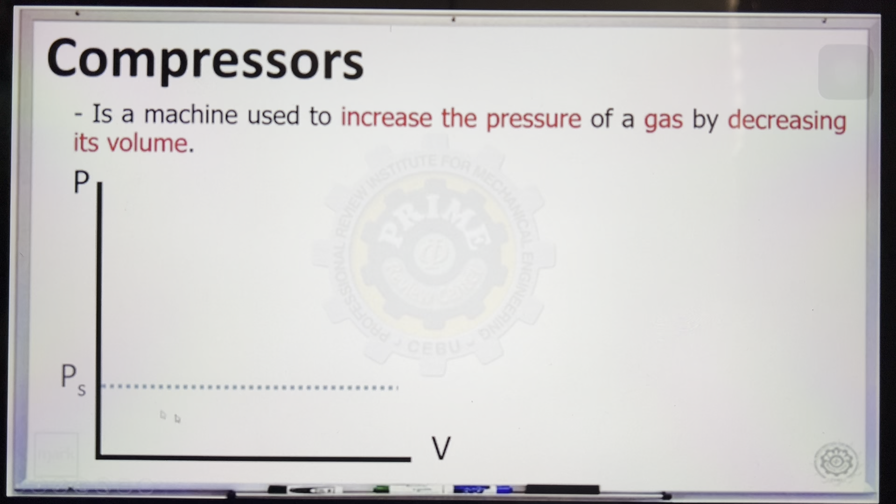Now in compressing the gas, we can compress it in 3 different ways. Let's plot the compression on a PV diagram. We have the pressure of suction, and the pressure of discharge. This is our input, and here is our output.

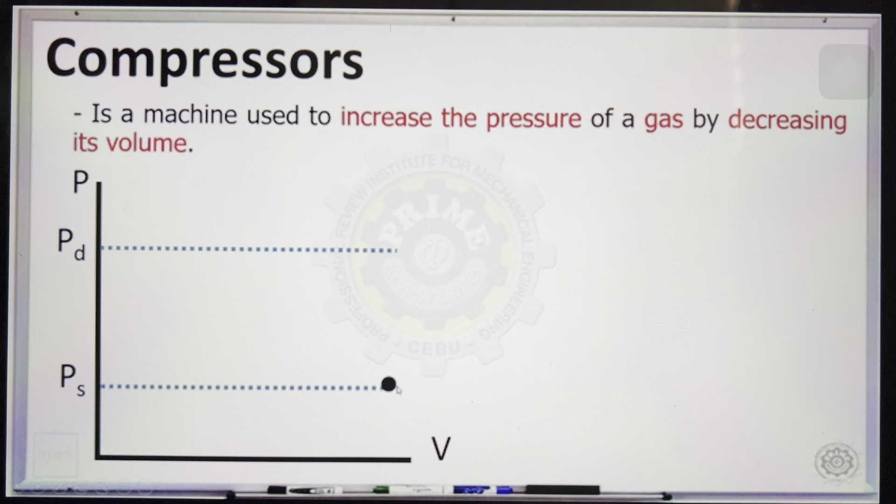We can compress isentropically, that is PV raised to K equals constant. We can compress polytropically, that is PV raised to N equals constant, which is steeper. And lastly, we can have isothermal compression, where PV equals constant. So these are the 3 different ways we can compress the gas.

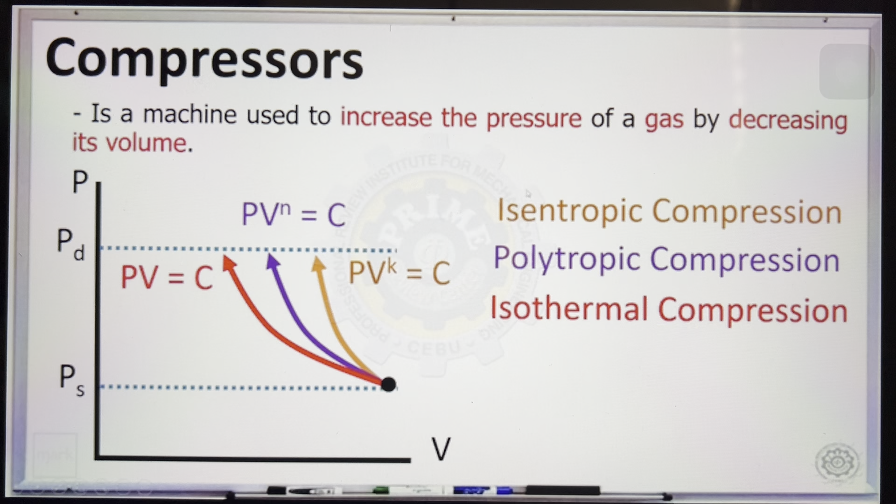Now let's elaborate further. Our discussion will start with the single stage compressor. Once we understand the single stage compressor, the adjustment for multi-stage—2-stage, 3-stage, and so on—becomes easy. So let's focus first on single stage.

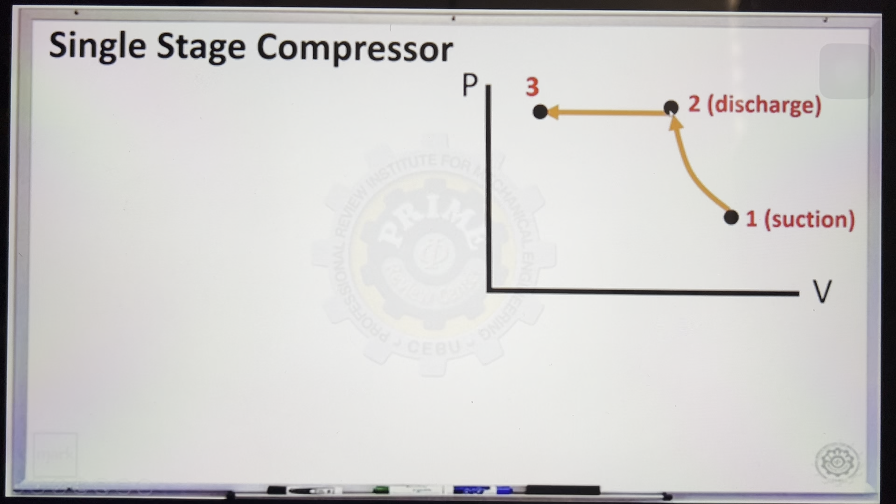In single stage compression, let's make a cycle. Point 1 should be our suction or initial point. We compress it going to pressure 2, that should be our discharge. Then from 2 to 3 is isobaric, and then 3 to 4, and then back to 1. So then we have a cycle.

Let's look at the parts of our single stage compressor. This is our maximum volume V1, and minimum volume V3. Let's call that the volume displaced by the piston. And this part, the clearance, let's call it VC. The difference between V1 and V4 is called the suction volume.

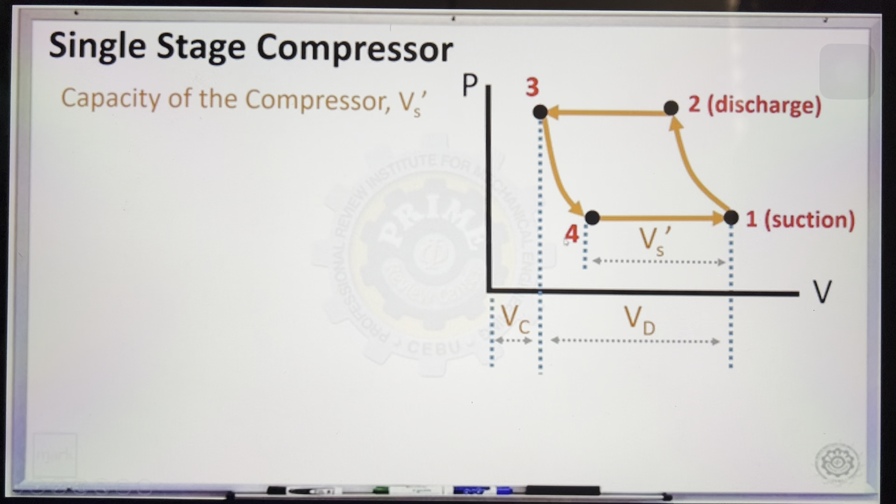Vs prime. So if we're asked for Vs prime, or the capacity of the compressor, the solution is simply PV equals mRT. Most likely the properties given will be at point 1: pressure at suction times Vs prime, the capacity of the compressor, equals mass times R times temperature at suction.

If we're asked for the clearance volume, the formula is C times VD. That should give us CVD—percent clearance multiplied by the volume displaced. Or by inspection, VC is equivalent to V3, where C is the percent clearance.

Next, the displaced volume. By definition, that is simply the maximum volume minus the minimum volume. In our illustration, the maximum volume is V1, and the minimum volume is V3.

Next, another formula for Vs prime: if PV equals mRT isn't given, we can get the capacity of the compressor by subtraction, the difference of V1 minus V4.

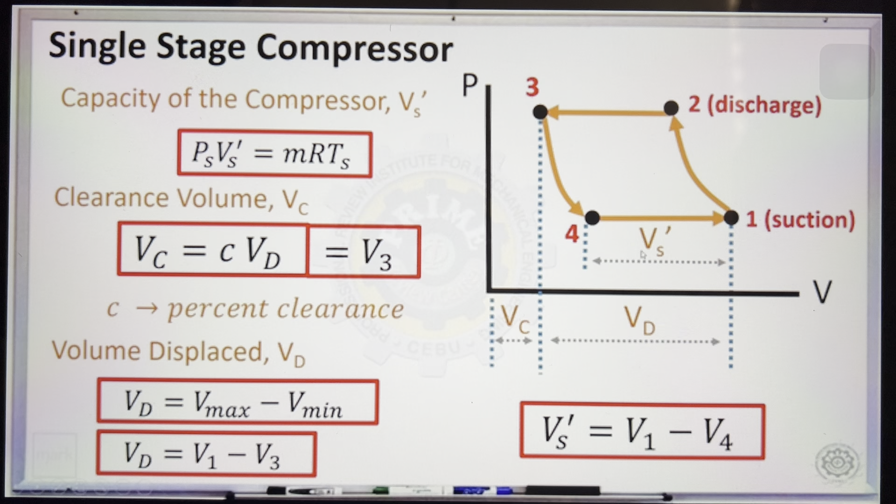So there are many formulas we need to remember, but if we can draw the PV diagram correctly, it becomes easy to recall the other formulas. Again, I'm suggesting we focus on the PV diagram, and if you draw this correctly, it's easier to recall the other formulas.

Another formula for VD: if V1 and V3, the maximum and minimum, aren't given, we may instead be given the description or dimensions of the piston cylinder. We know we have the length, the stroke, and the diameter of the bore will also be given. Once both of those are given, we can calculate the volume displaced.

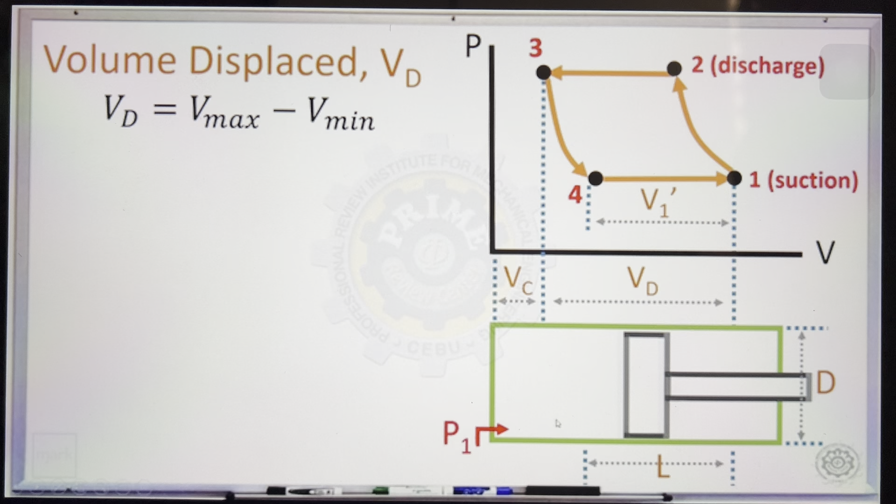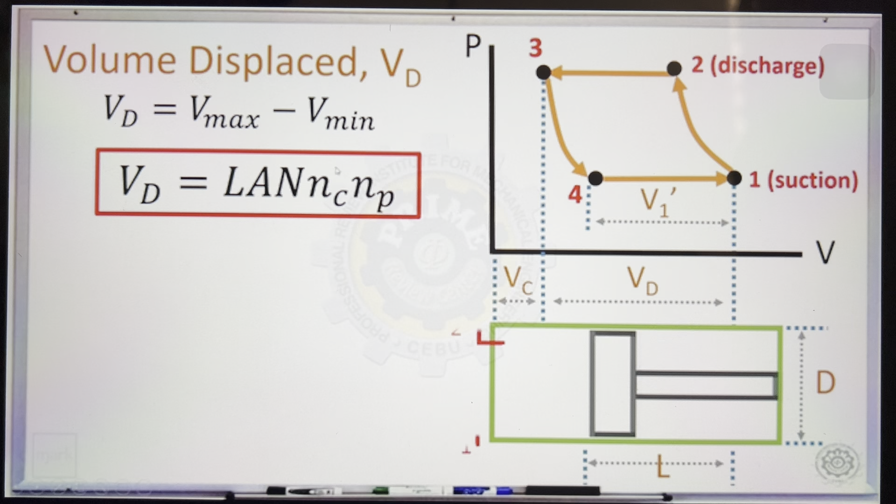So we have suction here, and discharge here. To get the volume displaced, if V1 and V3 aren't given, you can use this: the formula is simply LAN—L is the length, A is the area, and capital N is the engine speed in revolutions per second.

nc is the number of cylinders, number of piston actions. If nothing is mentioned, the assumption is 1 for number of cylinders and 1 for number of piston action. But if something is mentioned, include that in the solution for volume displaced.

For example, if it's mentioned as double acting, you put 2 for the number of piston action. So there are two formulas for VD: maximum volume minus minimum volume, or LAN—length, area, speed, number of cylinder, number of piston action.

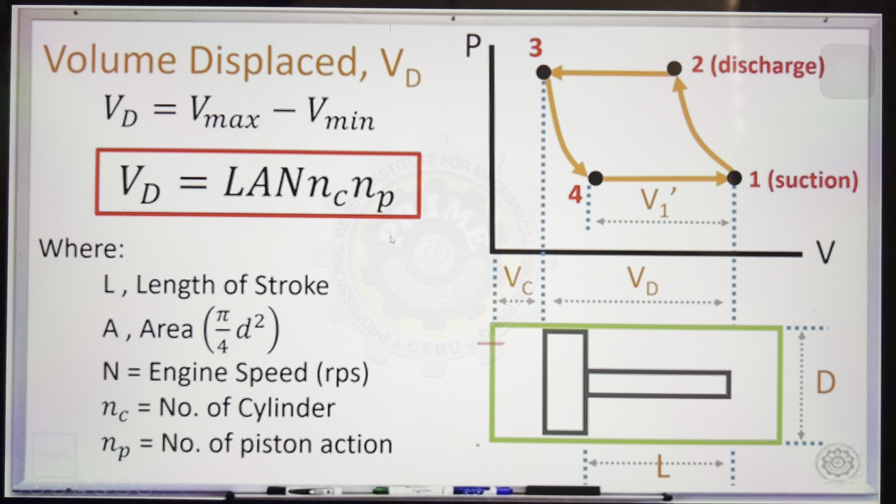Next, how about the pressure, volume, and temperature relations? This was already taught in thermodynamics, so we're simply recalling it. For isothermal, our formula is simply PV is constant.

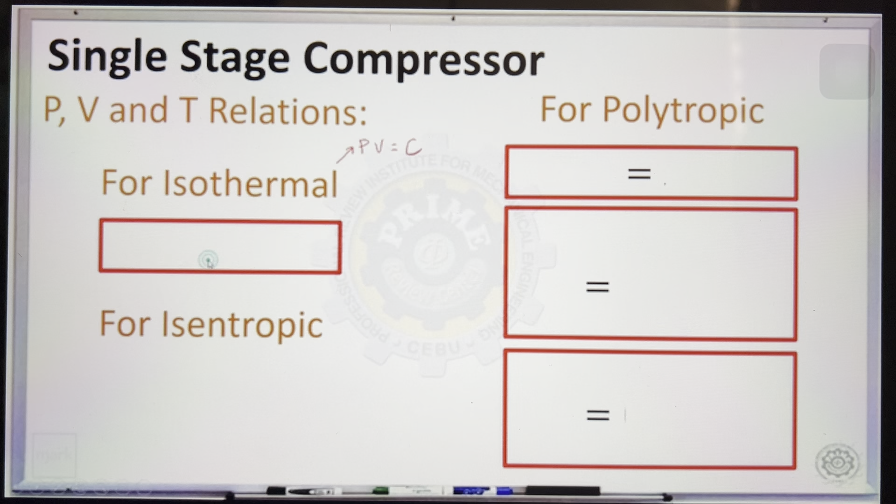So PV is constant, meaning pressure at suction times volume at suction equals pressure at discharge times volume at discharge—that's isothermal. For the polytropic process, there's an exponent N.

This is PV raised to N equals constant. So pressure at suction times volume at suction raised to N equals pressure at discharge times volume at discharge raised to N.

Another formula for the polytropic process, when temperature and pressure are given, is T-P-n. That's how I memorize it: T, P, n. So it's up to you regarding the subscripts—it can be suction to discharge or vice versa. So that's T, P raised to n: the ratio of temperature equals the ratio of pressure raised to n.

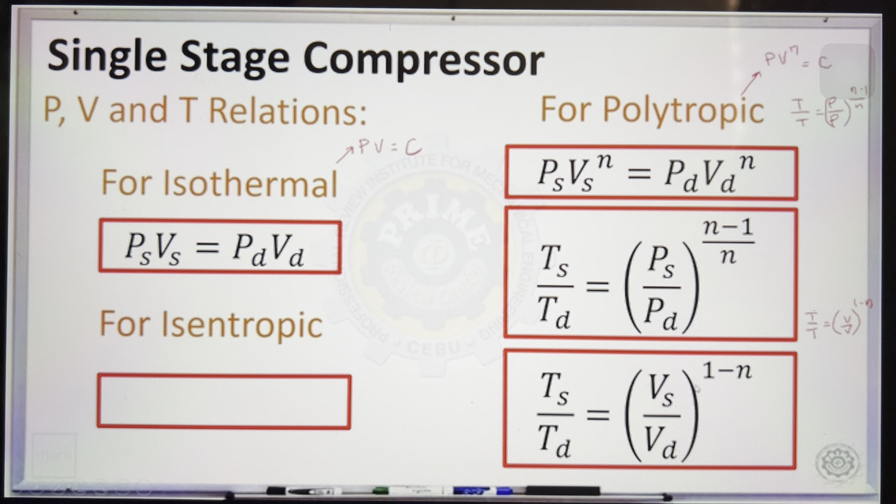For isentropic, just replace N with K, equivalent to 1.4. So the formula is the same for isentropic and polytropic—only the value of the exponent differs. For isentropic, K equals 1.4. So these are simply recalling what was already taught in thermodynamics.

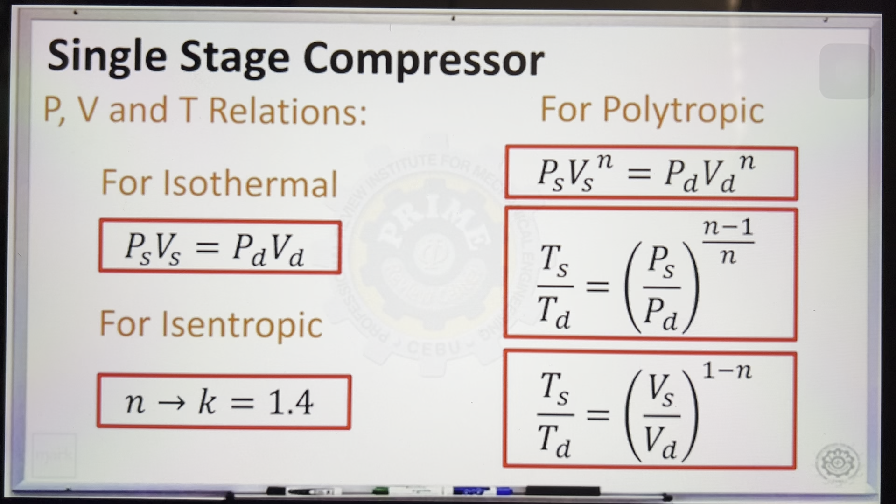Okay, i-derive natin yung formula. Kung makakalimutan yung formula, pwede siyang ma-derive using formula ng work steady flow. Pero still, I'm recommending kabisaduhin na lang. Okay, so pakita ko lang yung derivation.

Ang work ng compressor is equivalent sa work steady flow, na ang formula is n work non-flow. Ang formula ng work non-flow para sa polytropic process is PV: P2V2 minus P1V1 all over 1 minus n. Sa kaso na to, naging discharge minus suction na lang.

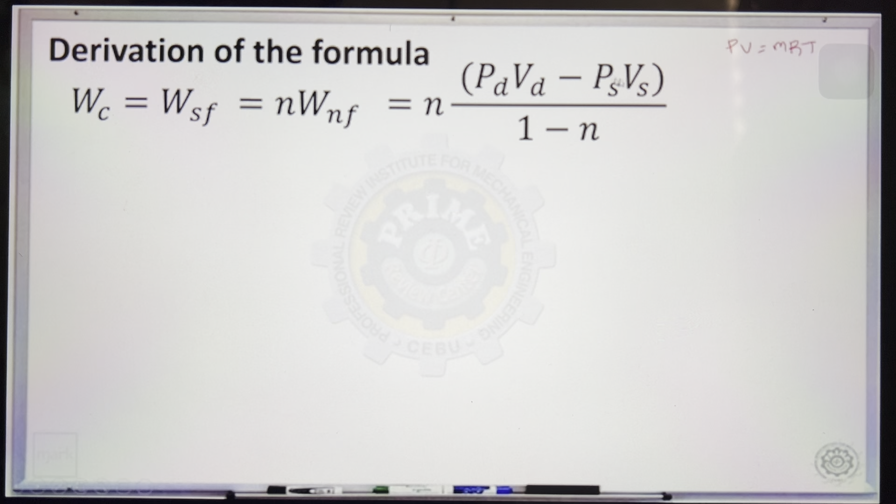Alam natin na PV equivalent sa MRT, so pwedeng palitan yung PV na to ng MRT. Yung PV dito, pwedeng palitan ng MRT din. So you can factor out yung MR. Ang matitira na lang is temperature ng discharge minus temperature ng suction. Pinalitan lang natin at in-adjust.

Next is simplification. Pwede tayong mag-multiply ng 1. TS over TS is 1, so walang nagbabago doon. Ang gagawin mo lang dyan is distribution. Yung numerator na TS, transfer mo dito. Yung denominator na TS, i-divide mo sa dalawa na to.

So ang mangyayari dyan, MRTS, eto is TD over TS. Dito naman, TS over TS, at ang TS over TS is 1. So eto yung naging formula natin.

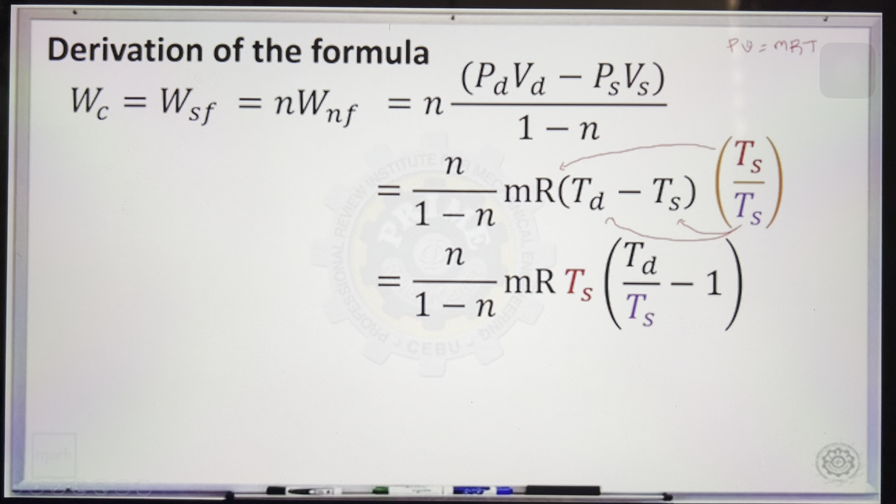Now, we all know na ang MRT, this is MRT, equivalent lang yan sa PV. So yung MRT na to, pwede palitan ng PV. Yung ratio ng temperature, pwede palitan ng ratio ng pressure. If you remember yung T, T, to the n: yung ratio ng temperature, equivalent sa ratio ng pressure raised to n.

So palitan yung MRTS ng PS VS prime. Palitan yung TD over TS ng PD over PS raised to n. So finally, we already derived the formula.

So medyo matagal yung derivation. I'm recommending kabisaduhin na lang to. Pero kung sakaling makalimutan yung formula, tandaan, work steady flow.

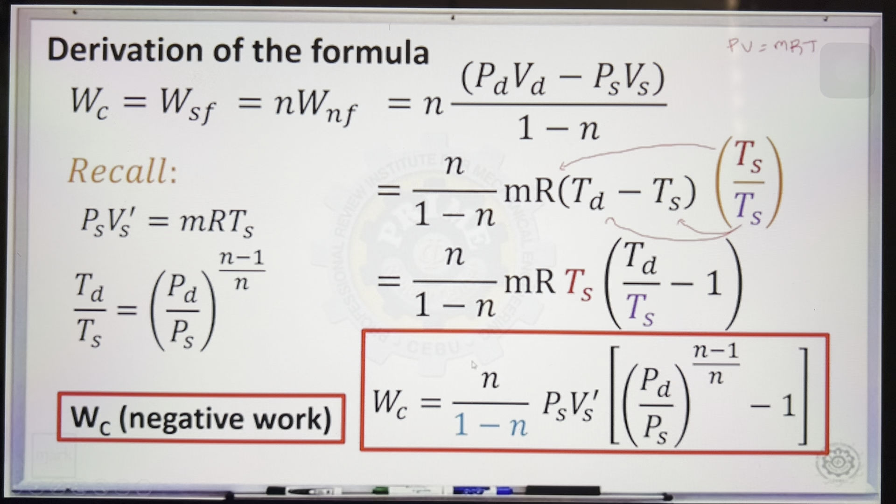Now, every time we solve work ng compressor, ang essence niyan or sign, it should be negative, kasi this is an input work. So isosolve mo siya correctly, you're anticipating a negative work. Kaya lang, in the choices, ang makikita niyong sagot, lahat sa choices, most of the time, positive.

So ang ginawa ng libro, kung pinapansin mo yung equation sa libro, pinagbaliktad niya lang yung 1 tsaka n, para yung magnitude ma-retain, pero yung sagot maging positive lang. Ang tamang sagot should be negative, pero since walang negative sa choices most of the time, pagbaliktarin nyo lang yung dalawa na to para ang sagot maging positive. Bottom line, they have the same magnitude. Pinagbaliktad lang yung 1 tsaka n para lang mag-positive yung sagot.

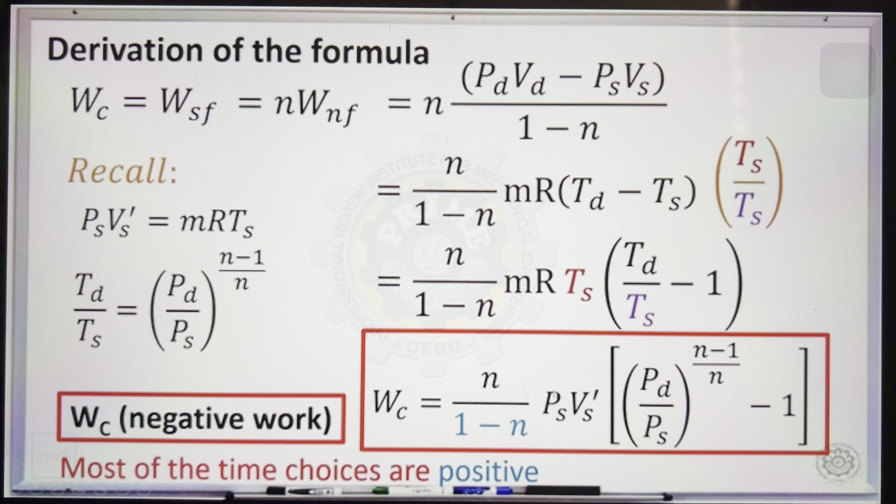Okay, summarize ko na yung formula. Pinakita kayo ng derivation, pero tandaan yung final formula. Ito yun, pagbabaliktarin ko lang to para positive. So this is our general formula: ang work ng compressor is n all over n minus 1, PS VS prime.

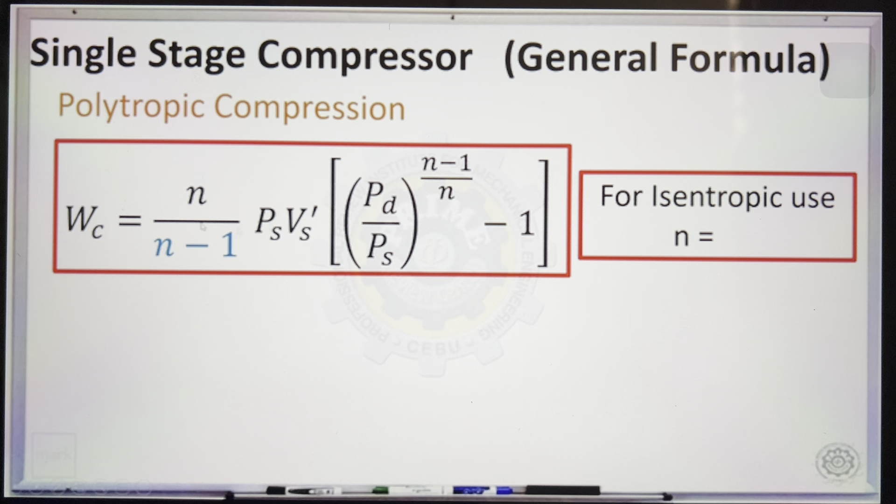So this is the capacity, multiply sa ratio ng pressure raised to n minus 1. For isentropic, palitan lang yung n, gawin lang 1.4. For isothermal naman, ang formula is simply yung formula natin sa work non-flow ng isothermal.

Ang work non-flow tsaka work steady flow sa isothermal ay parehas lang. That is P1 V1 ln lang, that is P1 over P2.

Kaya lang, pag ginamit mo yung tamang formula, negative pa rin yun. So ang ginawa lang sa libro, binaliktad lang itong dalawa: instead na P1 over P2, ang ginawa is P2 over P1. Instead na 1, 2, ang ginawang subscript is discharge saka suction, okay, para lang mag-positive. So these are the general formula.

Okay, isulat yan, transfer sa index card, kabisaduhin. Once makabisado natin, easy to use naman yan, for us lang kompleto yung given. Next.

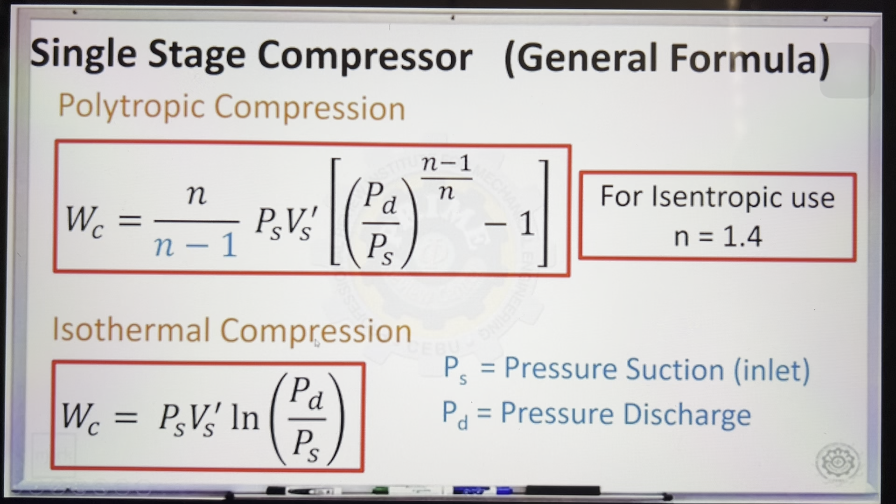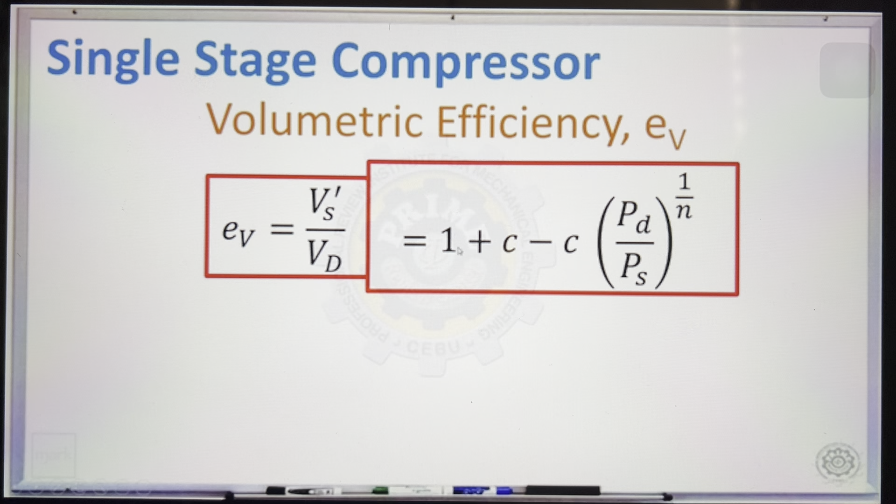Okay, for volumetric efficiency, ang formula naman dyan is ratio ng dalawang volume: maliit over malaki, so that should be suction, or the capacity of the compressor over the volume displaced. Another formula ng EV, kung sakaling hindi given yung dalawang volume, pwede siyang makuha using 1 plus C minus C, ratio ng pressure, discharge over suction, raised to 1 over n.

Okay, another formula is the piston speed. Pag tinanong ka ng piston speed, that is simply 2LN. Next.

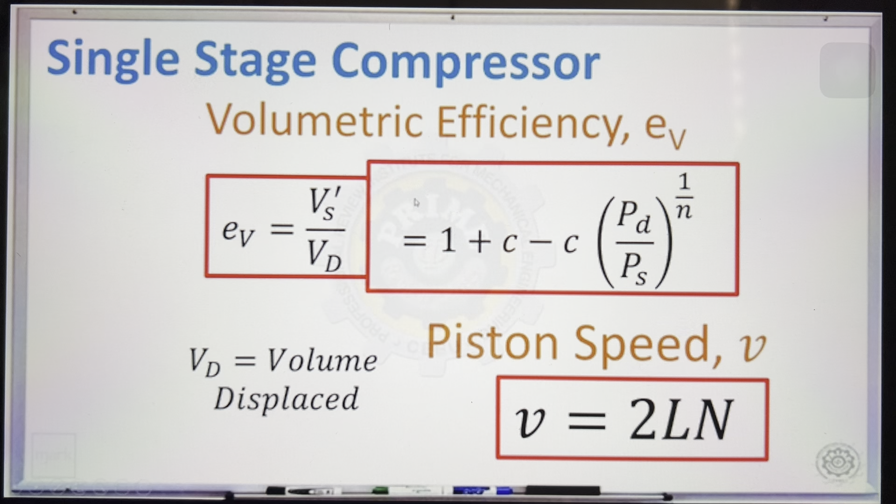Another formula ng work ng compressor, pwede siyang makuha using MEP times VD, ito yung mean effective pressure multiply sa volume displaced. Work ng compressor yun. Pwede rin namang mass times difference in enthalpy, kung sakaling enthalpies are given or involved. Pwede rin MCP delta T. So depende talaga sa given.

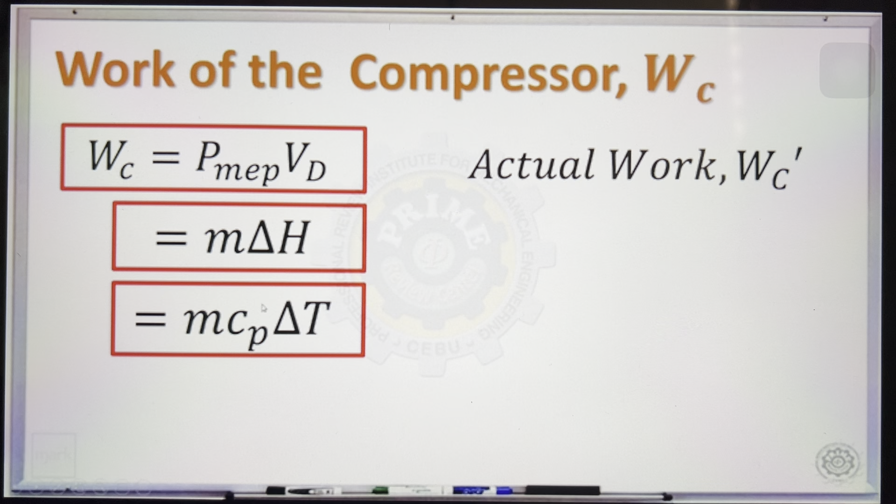Now, how about the actual work? Yung makukuha nating sagot dito, lahat yan ideal work, considering the efficiency ng compressor is 100%. Kaya lang, paano kapag may given na efficiency yung compressor? How to get the actual work?

So ito yung palatandaan namin. Kailan ba i-multiply, kailan ba dinidivide yung efficiency? Kasi sometimes, minumultiply natin, sometimes dinidivide. So para hindi tayo nanguhula, tandaan nyo lang to.

To get the actual work, consider nyo yung machineries. If it is power producing, i-multiply mo yung efficiency para makuha yung actual work. If it is power consuming, i-divide nyo naman yung efficiency. Since ang compressor is an input or power consuming na machineries, ang ginagawa sa efficiency niya, kailangan i-divide yung ideal.

So to get the actual work, you solve for the ideal work and then simply divide by the efficiency ng compressor. Pag dinivide mo yung ideal ng efficiency, then that's the time. Makukuha nyo na rin yung actual work ng compressor.

So hindi ganun kadami yung formula sa compressors. Hopefully na-post natin, kinopya natin yung mga formula at nilalagay sa index card. So kailangan na lang sample problem. So let's try to solve single stage compressors.